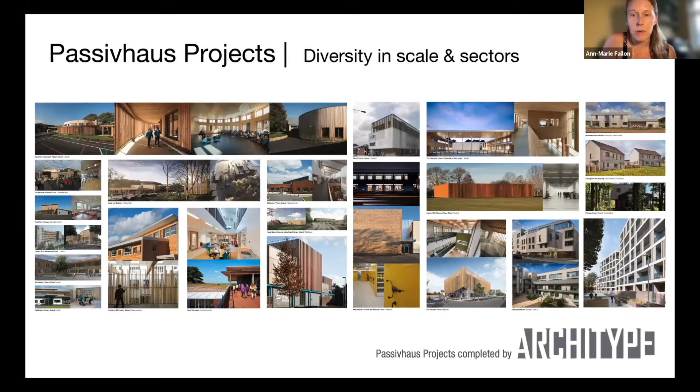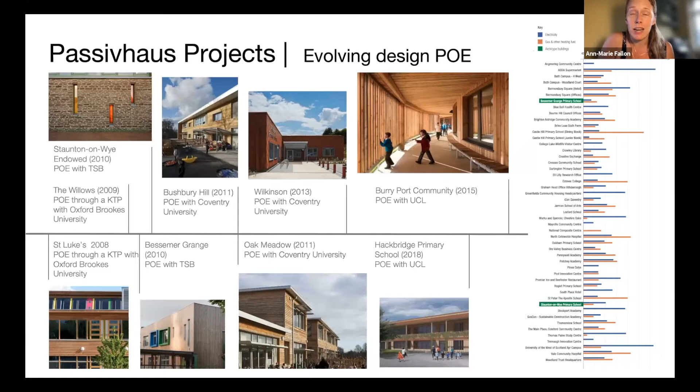As Jessica's mentioned, we've spent 15 years now developing passive house non-domestic projects in the UK at varying sizes, aesthetics, locations and typologies. Here's just a couple on the screen, and today's focus is going to be on schools and school design. What underpins a lot of our design is the post-occupancy evaluation we've been carrying out, particularly on our earlier schools, even some of the non-passive house schools at the very beginning, where we have a really good track record of that proof of performance, that proof of concept. That's so important when we're speaking with clients and convincing clients, particularly in this era now where indoor air quality and health and well-being has become very at the forefront of decision makers' minds.

So what does that mean for generally our approach to passive house projects? Well, the most important element to us, and I'm sure many of you will agree tonight, is that the brief and establishing what those requirements are is really, really important. And for those of you across the water, this is a representation of the RIBA plan of works, the architectural plan of works for the UK, the Royal Institute of British Architects.

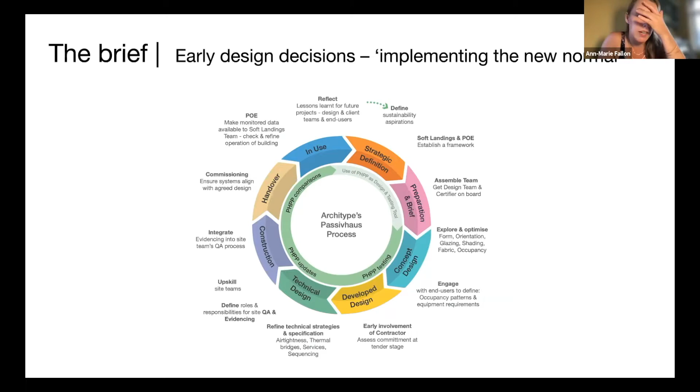What we've done quite a bit of work on, almost beyond this workflow diagram, is to look at how passive house is incorporated into that workflow, and actually working with RIBA and the Passive House Trust in the UK at the moment to really formalise that as an information flow to help architects and help the industry in the UK. Really the critical element of that for us is the post-occupancy, the reflection, and then the redefinition of that. We might touch on some of those aspects later on in terms of informing that design.

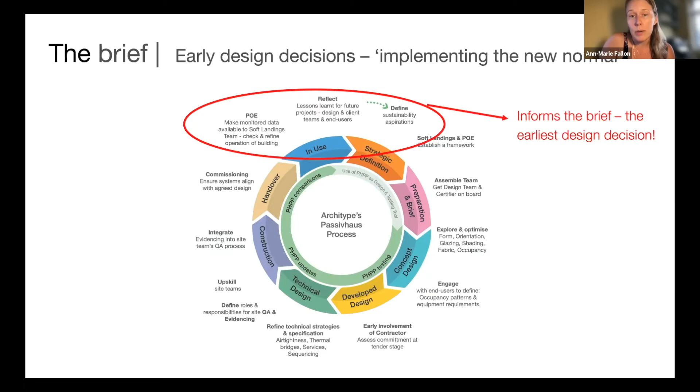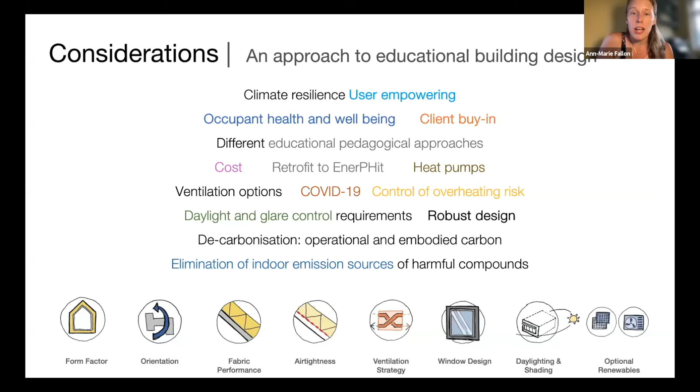Now, of course, in my 15-minute slot today that Zach's timing me avidly on in the corner, there's so many topics and so many areas that we could talk about, but I'm going to focus on a couple of different areas: costs, post-occupancy and air quality, and the typical design approach, and just end with a couple of built case studies and one key study in Scotland that's just under development at the moment. There's a PhD that we could write on that one page, and we can welcome to discuss some of those topics afterwards today. So how do we approach passive house design?

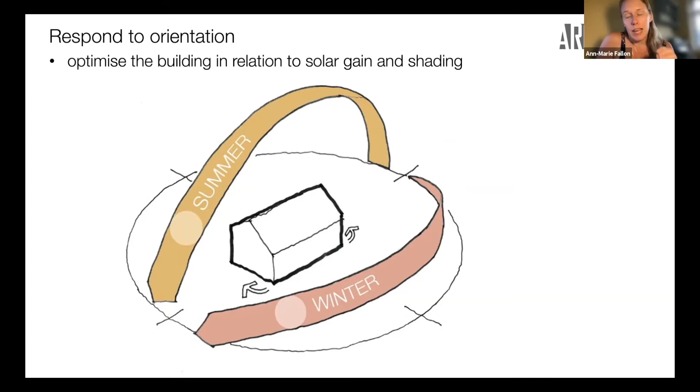In that cyclical collaborative relationship that we've established with the workflows of architecture in the UK, we're always looking to seek out the simple form and the reductive form. Many of you around the table will want to push that and implement it on your projects, and have probably been doing so already.

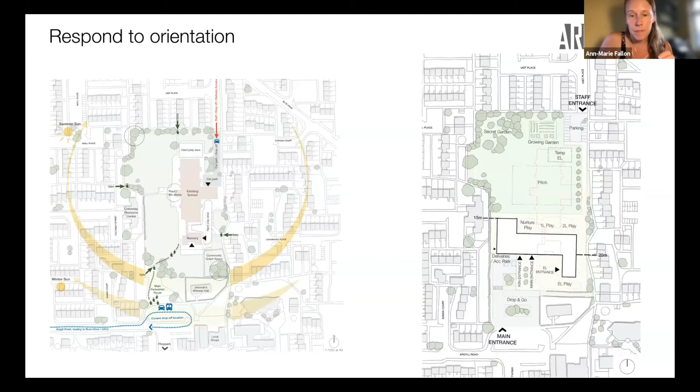A really simple example of this is a project we're working on in Scotland at the moment that's about to go to site, where the original school was facing east and west. Instead of saying we'll just put the replacement school east and west alongside, we actually pushed the planners and the client to turn the project to a north-south orientation, which helps with passive house keep the form simple, but also gave a connection and a sense of architectural place in terms of that simple massing option. On other sites, there's a drive to try and be within 15 degrees of south.

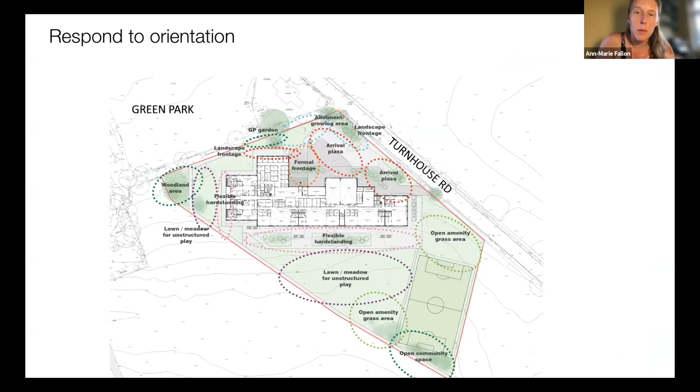We're aware that all over America there's a certain desire or lack of desire to be totally south, because there's very diverse climates across America. So what we're looking at here may not always be representative of the most optimized form for your zone. We look at that form factor and surface area to volume ratio as much as we can as we design.

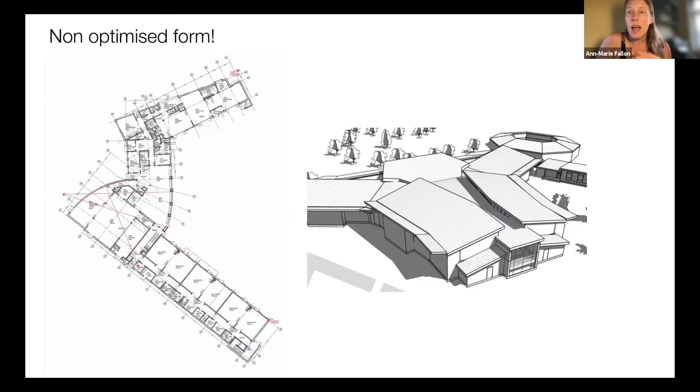Because as an architect myself, I can say this with gusto, we love complexity. We like adding motifs and symbolism or devices to our design that reflect an alleged ethos. Really the ethos at the moment is the climate emergency, and how does that provoke a response from designers. What it should respond with is not buildings that are very additive in their design and create lots of complexity for the contractor to build. We want to create real simplicity. It maybe cannot always be as abstract as the Imperial War Museum here is, the archive that we worked on near London, but that ethos or that simplicity principle needs to be there.

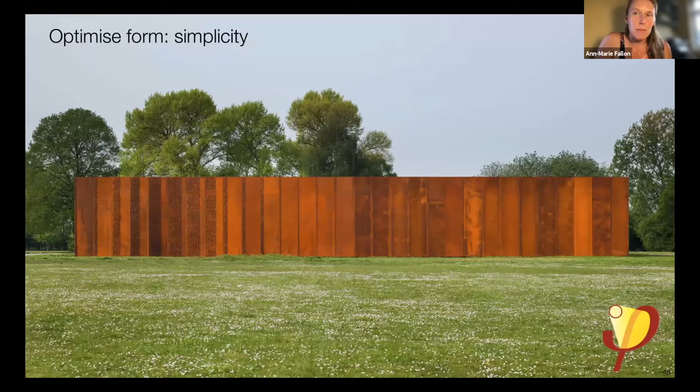That doesn't mean that we can't have complex forms or larger forms that are east-west facing, or H blocks that need to accommodate a client's brief. We just need to be very mindful of how that is driven through design.

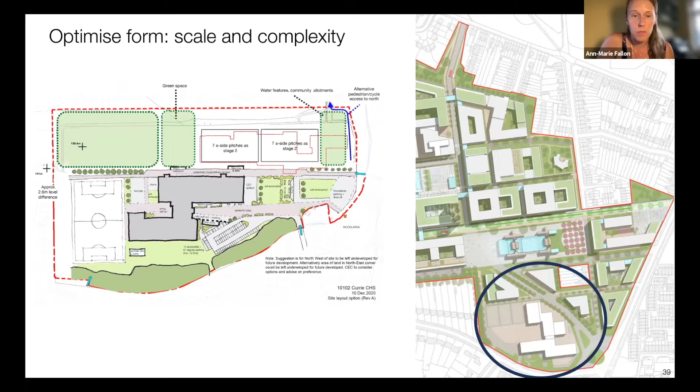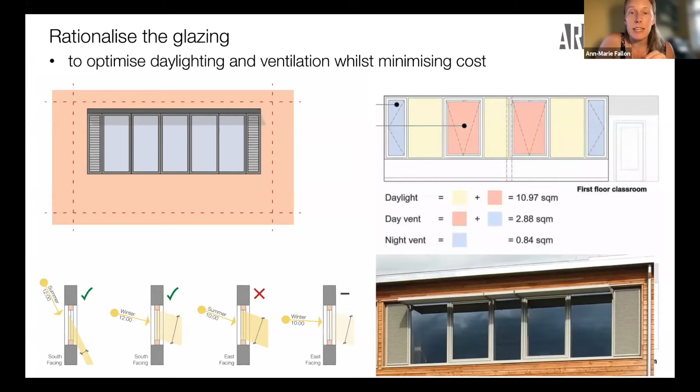On the left we'll talk about Currie later on, and on the right that's Harris Academy, Sutton, which I'll also touch on briefly. The approach to glazing - as architects we love to overglaze, and some of our own lessons learned from post-occupancy has been about reducing the size of glazing and only using it where it's most useful to us, typically above 800 mil in our part of the world in the UK, with stringent requirements around day venting, daylighting, and night venting as strategies alongside the MVHR solution, integrated into the architecture.

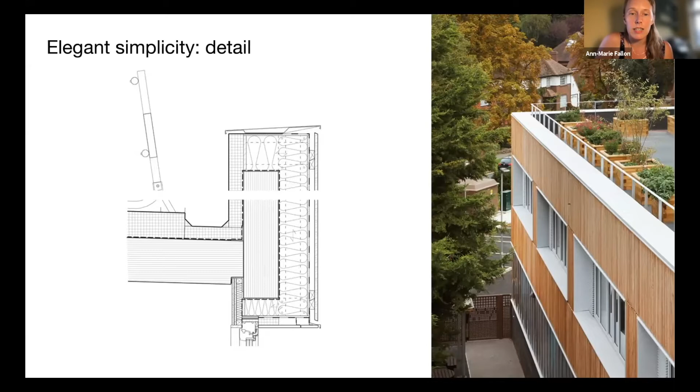The deep reveals on the Enterprise Center on the right hand side with innovative straw bale, and the integrated shading on the left from Harris Academy. We try to avoid too much additive shading to architecture where we can. We like keeping the details simple and repetitive, again, where we can, where the client and the brief allow it.

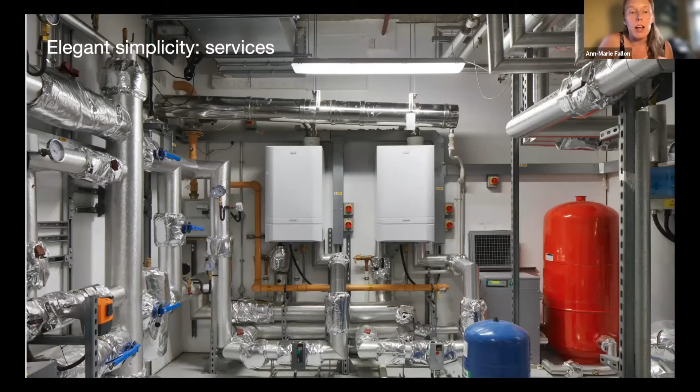We also know that engineers love design complexity and additive kit and new technology in their designs. What we strive to apply as a strategy is challenging the engineers and design teams to reduce the amount of peak risk they build into their designs as much as possible within reason, and drive for that simple approach. That leads to reduced services and reduced embodied carbon of services ultimately.

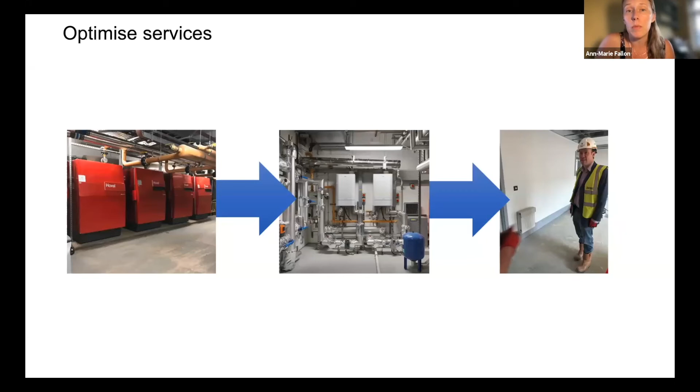In this situation, which was a gas radiator on the right hand side in one of our classrooms - a really, really tiny radiator. As we decarbonize, we're seeing these radiators maybe extend to 1.5 or 1.8 meters high by 300 or 400 mil wide, which is much smaller, probably a quarter of the size of radiator you would have had in a traditional school with a high temperature distribution network.

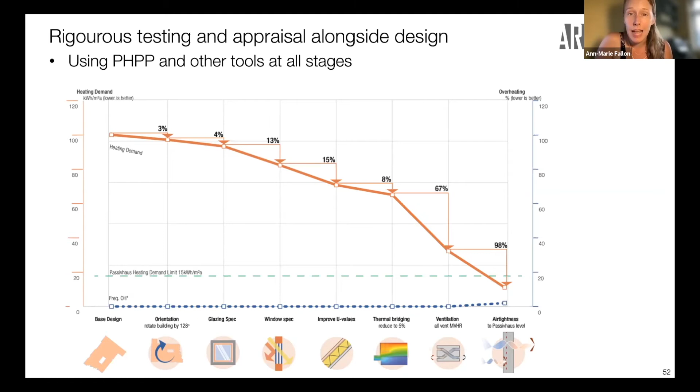We use PHPP at every stage. We don't just use it at planning and construction stage and hope for the best in the meantime - we're constantly using it as a design tool, which does take time and can take extra hours on a project, but we feel it's really worthwhile.

That evidence is seen through all our reporting through the RIBA stages, where we're very clear and transparent with the client at all times about where the risks are, how we report on those risks, and how far we are from maybe the idealized design because of their brief requirements.

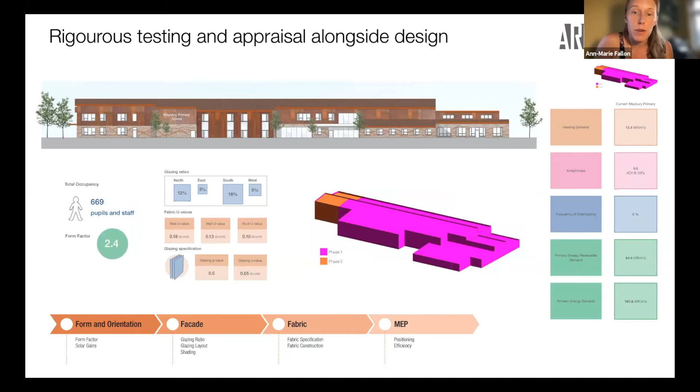A bit of a provocative statement here for clients and design teams - are we really wary of trying to design better quality buildings? The quality agenda in Scotland in particular at the moment, because of previous construction failures, is really, really relevant and prevalent, and also occupant well-being.

So really, if we're not designing to passive house, what are we actually offering as a product? Because it's essentially a building as a product. If we had a car with dodgy air conditioning, or a leaky draft stripping around the doors, we'd bring it back to the garage, but we seem to just sit in buildings that are leaky and defective and poor quality and bad for our health, and not actually complain or do anything about it.

So really, as designers, we shouldn't be allowing that to happen. We should be really collaborating away from that.

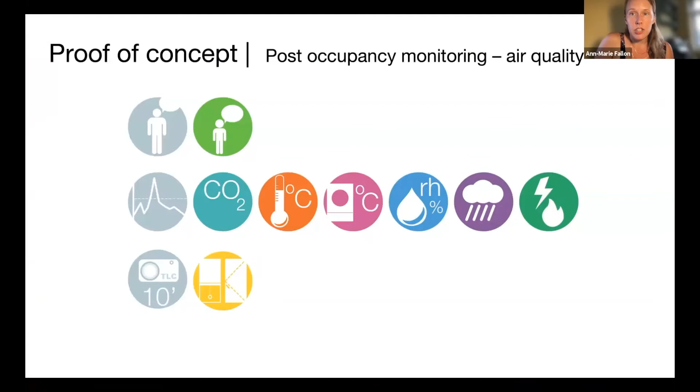There was various post-occupancy evaluation done on this. There was a misplaced ventilation strategy that was both natural and mechanical in February, and we had user issues with how people engage with the facade.

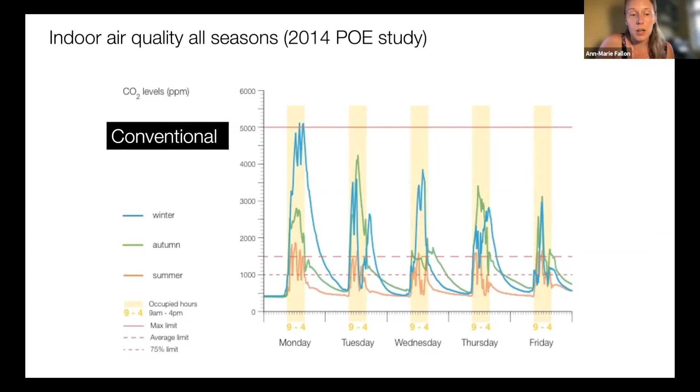This was a study of a 1970 school as a benchmark and a larger POE study. This was an example of one of our own BREEAM excellent schools, or BREEAM very good schools, from 10 years ago, where yes, we have improved on the conventional requirement. In the summertime, for example, because we had windows open, we were well below the 1,000 parts per million limit. But during the day, because it was naturally ventilated with no mechanical ventilation, there was no control.

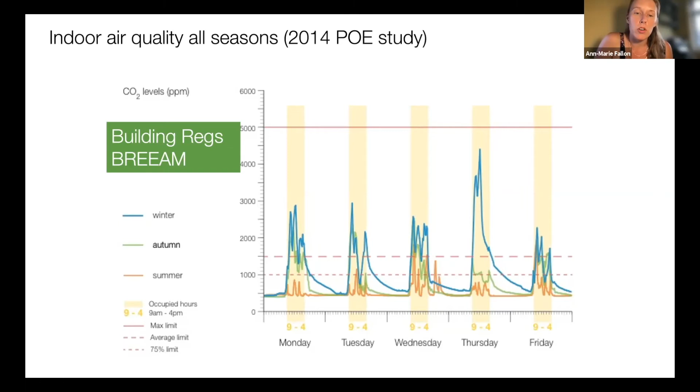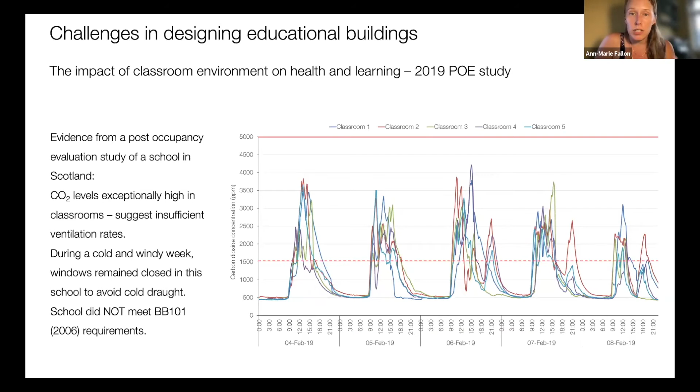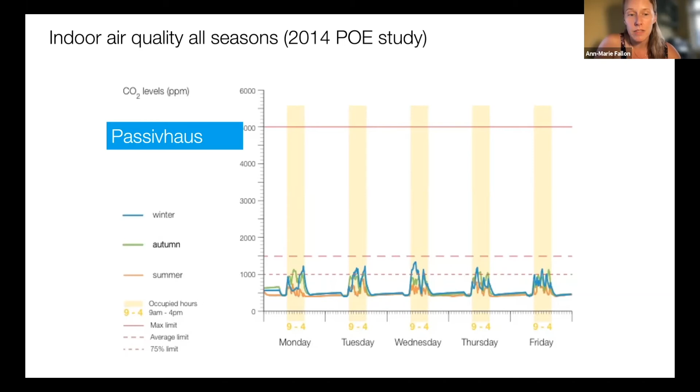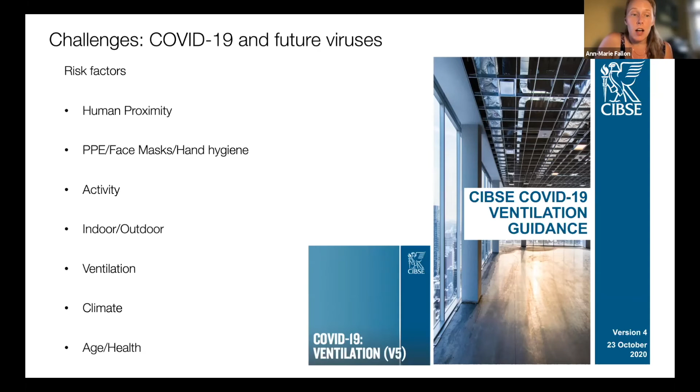Why is ventilation important? We're all probably exhausted from listening to the implications of COVID and the aerosol distribution impacts, and there have been a lot of risk factors associated with COVID and good indoor air quality, especially in this post-viral world. It's not always building led, it's occupant led and environment led. The current solution in the UK, not sure if it's the same in America, is to put the heating on in winter and leave all the windows open as the best solution to avoid infection. What we're saying instead is that we need to carefully consider airflow, look at mechanical ventilation, and look at the evidence from schools we've collected on CO2 levels that can be very low and very healthy, taking that forward as a more clever, informed strategy rather than just letting energy flow out the window because of COVID risk, while still managing that kind of virus in a post-viral world.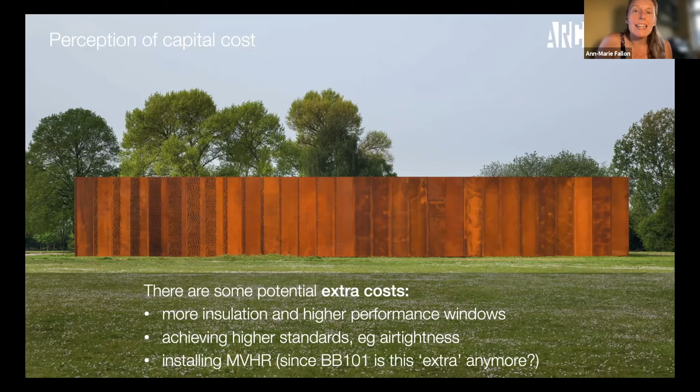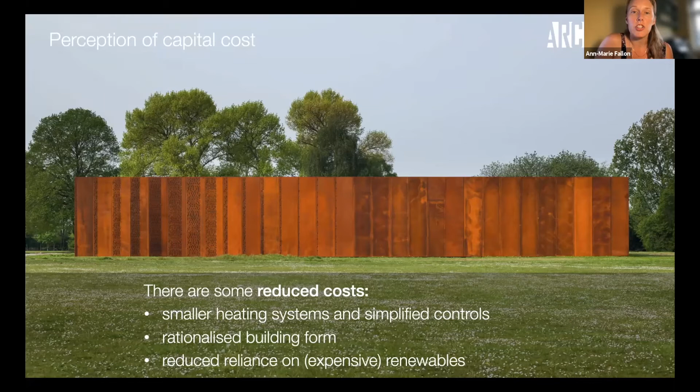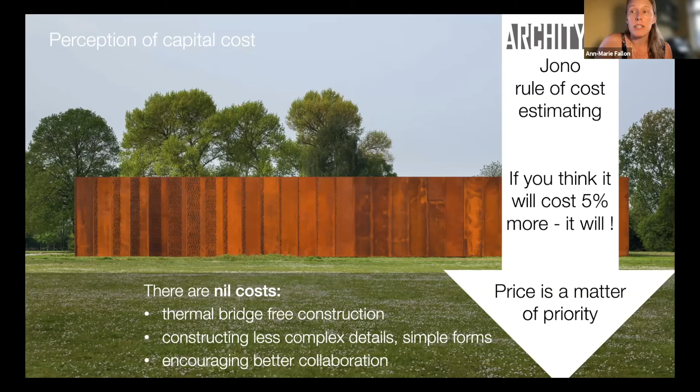So really, is it extra against current cost metrics? We would argue not. There are some reduced costs if you have an intelligent, informed design, especially around heating systems, keeping the form simple — that kind of new environmental vernacular that the climate emergency should be driving, which we just don't see enough of yet — and reduced reliance on renewables, because we don't want them to offset, we want them for generation. We would argue then that there's nil cost. There's a simpler form of construction and detailing and collaboration that allows that cost to remain very low. And if you say something is passive house and someone prices in 10% or 5% risk because of that, then every doorknob, every piece of joinery, every piece of kit in that building gets that risk tag added to it. Price is really a matter of priority, and we need to be very careful how we manage that.

A couple of bits of evidence from previous schools. Back in 2015, we were delivering above DPC levels, excluding all the abnormals you have to deal with on sites, and excluding the crazy inflation that's happened since. We were dealing with projects at £1,200 to £1,300 per metre squared above DPC, and that was reflected in two completely separate studies — one with a contractor we partnered with over 5 schools, and another separate funded cost study review.

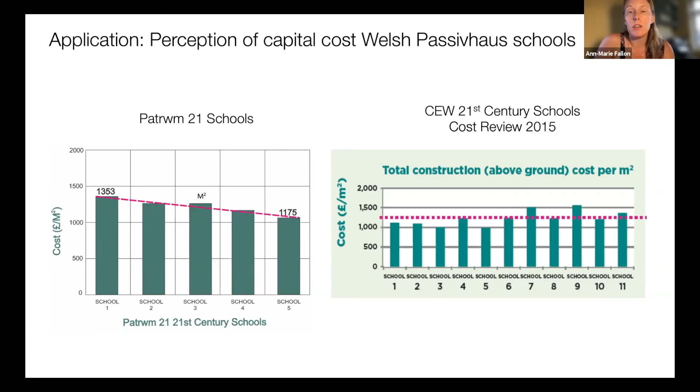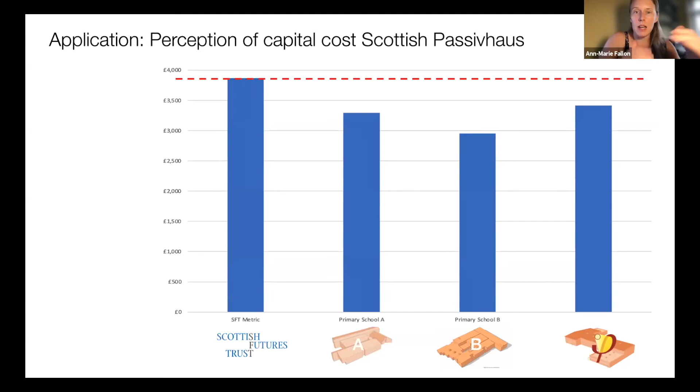On the right, recent cost metrics on Scottish passive house schools. The metric now includes enhanced quality and enhanced statutory requirements in Scotland, the mandating of mechanical ventilation, and an allowance and enhancement for quality. It's been reflected in Scotland that construction quality in the public sector has been very poor for a number of years. This study illustrates that the new Scottish Futures Trust metric has an allowance for passive house in it, benchmarking a recent passive house school cost exercise against two previously completed non-passive house schools. So yes, we're a little bit over Primary School B, for example, but we're still well within the current metric. This is important when we look at capital costs, because even a capital cost from last year or 3 months ago may not be as relevant, or cannot be directly compared. So there is a kind of complexity around how we approach the capital cost agenda.

We built all these schools for standard budgets in England 8-9 years ago now, and in Wales. The Enterprise Centre, which was a very low carbon building with novel straw cladding, timber frame, CLT etc, came into the median cost range in 2015 for university buildings for that particular university, within the 10 years. And there's an illustration of the project's finishes.

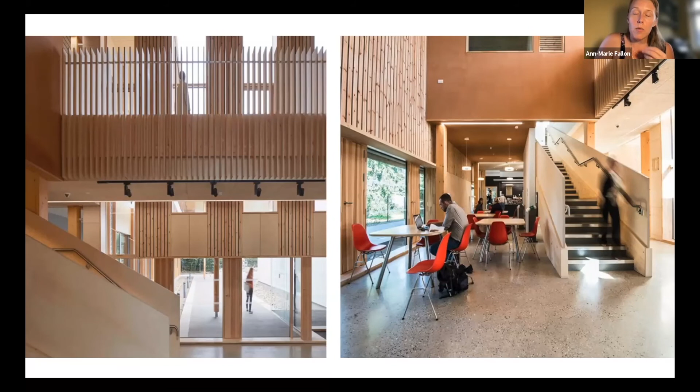So again, more high-end finishes. Our first secondary school, passive house secondary school, completed in 2018, came into the median range of costs as well, below the metric we just looked at from Scotland. This was CLT with concrete, a high level of timber, exposed specialist finishes, and a reasonably competitive cost per metre squared for a London project.

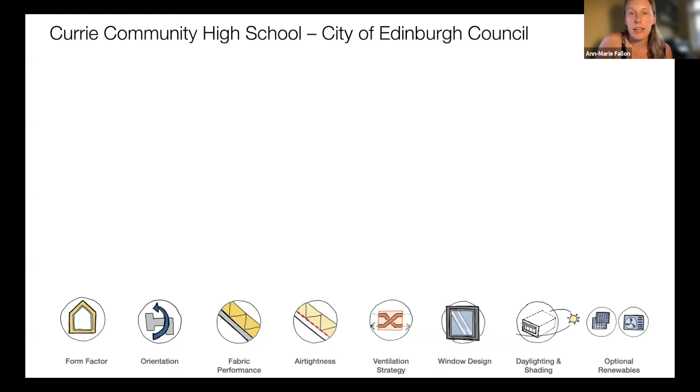Just to finish off, a specific focus on Currie Community High School with City of Edinburgh, which is currently at RIBA stage 4. We're preparing the production and code drawings to send to site early in the spring next year. It's a replacement school for a very poor conditioned 1,000 person secondary school just southwest of Edinburgh.

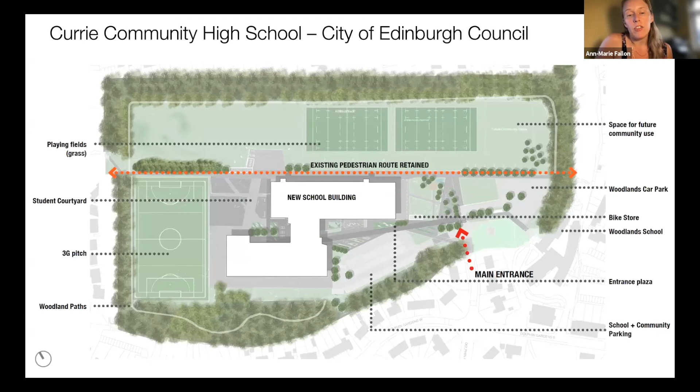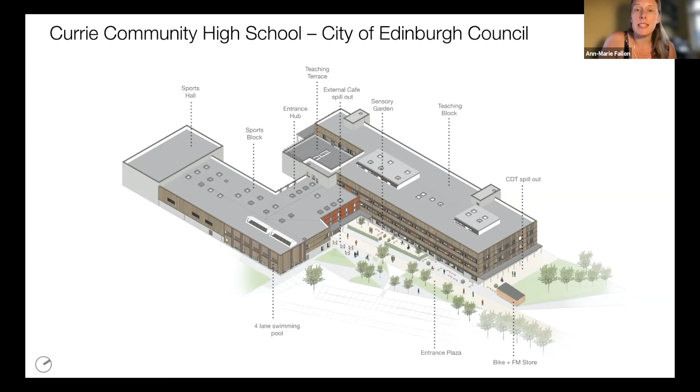It's a more complicated, extrapolated form because of the brief requirements. We have swimming pools, sports facilities, cafe, library, a lot of integrated society or community function into this school. Edinburgh is looking to consolidate their buildings into more sustainable, high value assets over the next 60-year life period of these schools, with a lot of innovation in the pedagogy and learning approach in terms of linked faculties and how learning plazas are used.

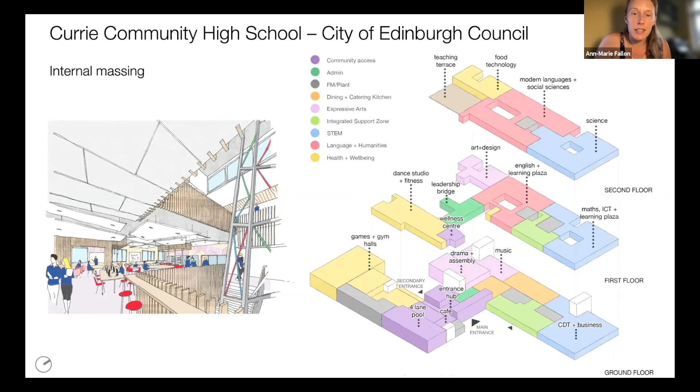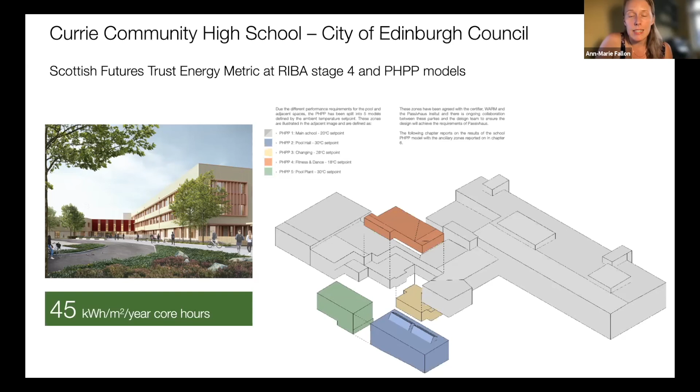Don't have a lot of time to talk about that today. We have a certain energy metric we need to meet for Scottish schools now, and we're more than complying with that. As an interesting side note, because this school has a swimming pool, we're actually working directly with PHI and Jessica in particular on 5 PHPPs for this school. So we have 2 Passive House certifiers on the school, and we're developing that as well as the stage 4 drawing packages.

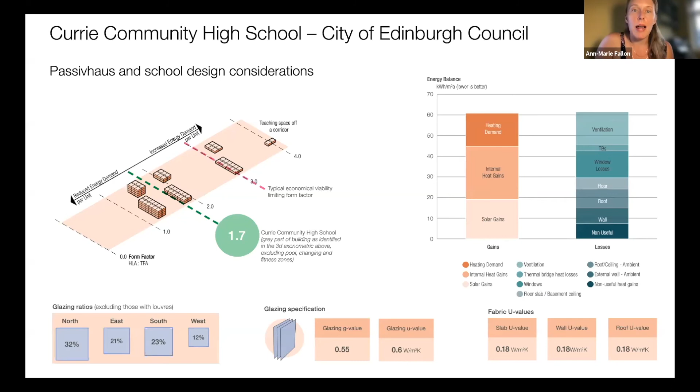Just as a note, some of the particulars in terms of the basic glazing spec and U-values that we have in. It's not ideal glazing ratios because we have lots of classrooms facing north, so we need to accommodate a high glazing ratio to the north. That's been sensitively managed with the energy balance of the whole building envelope and the internal heat gains.

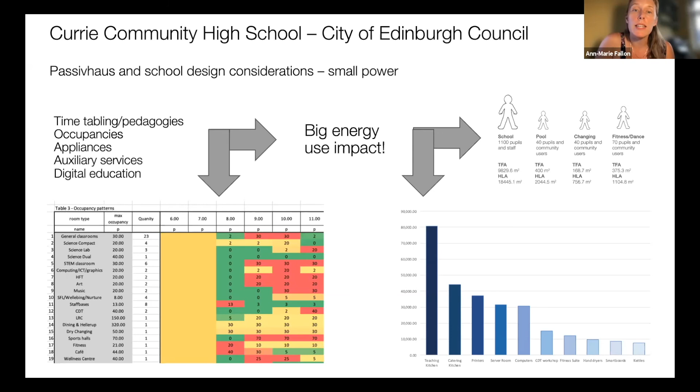Some of you may have come across this already in terms of small power and how we look at that load and modelling. We need to be very careful around the usages, timetables and small power impact of our internal gains in these buildings. Probably in America you're much more attuned to that with more cooling demand in certain regions than heating demand. A little bit of an indication of the internal of the swimming pool.

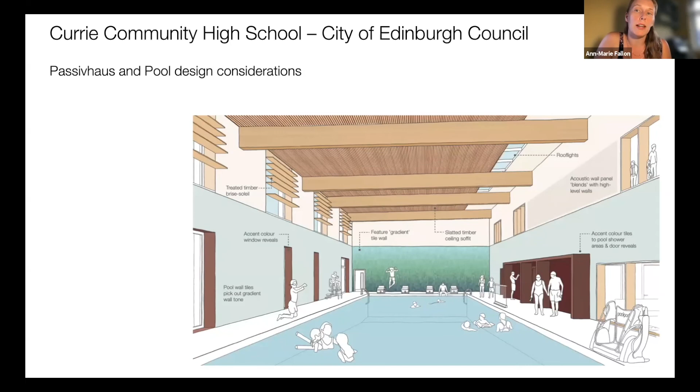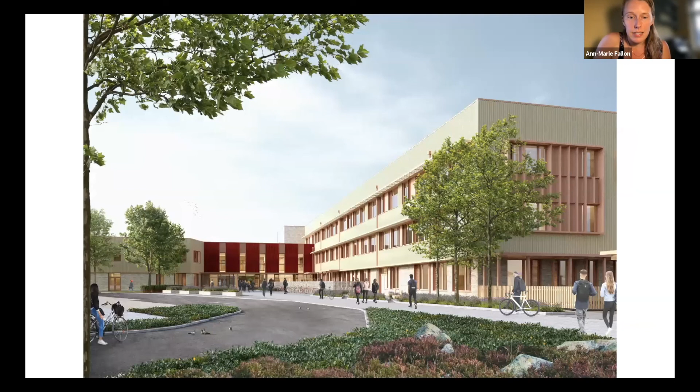We can come back to that in more detail about how we managed to make the swimming pool a little bit more efficient than other types of projects. Just an element of finishes, referencing Scottish context, and some images of the actual building as it is finished at this current production information stage. You can see examples of integrated shading on different elevations. You're welcome to pop back to some of those in the Q&A session.

This is part of a wider remit of schools we're doing in Scotland, where we're hitting these energy targets and providing various educational needs across several projects, always benchmarking against Passive House on this metric. Edinburgh City Council have been a really leading client in Scotland, where they've mandated Passive House as a requirement for all of their new schools.

We're currently doing a study with them on the retrofitting of 50% of their existing school estate, with a couple of EnerPHit level projects already instructed to progress as physical projects. They have many schools in the pipeline for this next wave of educational funding. They visited some of our projects down south in England, did lots of reading and referencing, and went to different workshops and studies over 2 or 3 years. Now, even though they haven't delivered a Passive House project quite yet, they will in 2 years' time, and they've really embraced the quality and quality assurance aspects of the standard as part of their quality agenda for approving buildings for people.

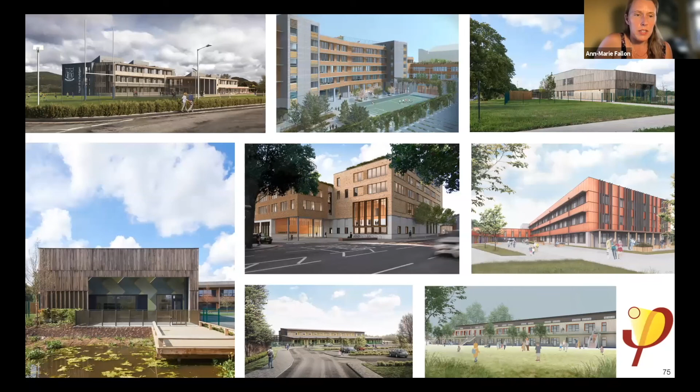Just an example of a couple of the other large scale projects we're doing across the country at the moment, 1 or 2 completed and others still in design, again all aiming for Passive House. So there's a slow trickle of increasing larger scale clients being more involved and taking more account of the net zero approach implemented in England as well as Scotland, as well as the fabric benefits and comfort benefits of Passive House.

So that's me. I don't know if I've hit exactly 15 minutes or not.

That was incredible.